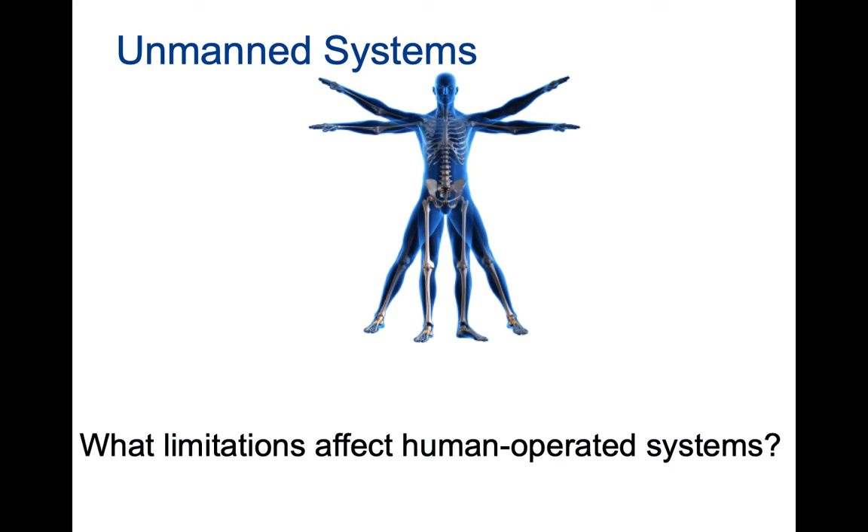When you consider NASA astronauts or aircraft used in the military, spy planes are a great example because spying can take a really long time sometimes. What are the limitations? Well, how many hours can you stay awake for consecutively?

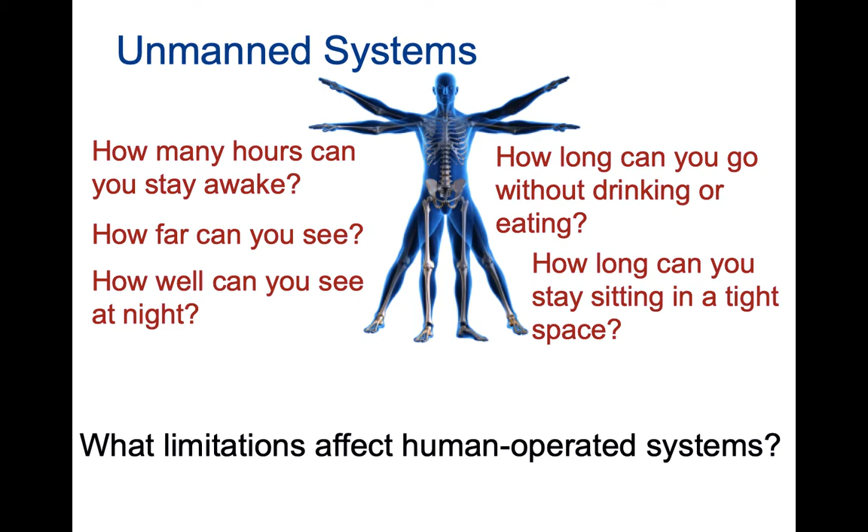Most of us operate on 12 to 18-hour days. How long can you go without eating or drinking? How far can you see? How long can you stay sitting in a tight space? How well can you see at night? How long can you survive in the vacuum of space? And how long can you survive in microgravity?

So these are all questions that Boeing and Lockheed Martin and NASA and other companies have to deal with all the time when it comes to trying to understand how humans can operate and under what conditions.

Even the best military pilots and most well-trained astronauts are going to struggle and have these limitations. So this brings to the forefront the idea of unmanned systems and the inherent advantages that an unmanned system can offer. And, of course, this final question here: what is the value of human life?

Obviously, we don't want to lose human life, and so this cannot be overstated. The idea of an unmanned system can really ultimately prevent human lives from being put in harm's way, and so that can go a long way to protecting us.

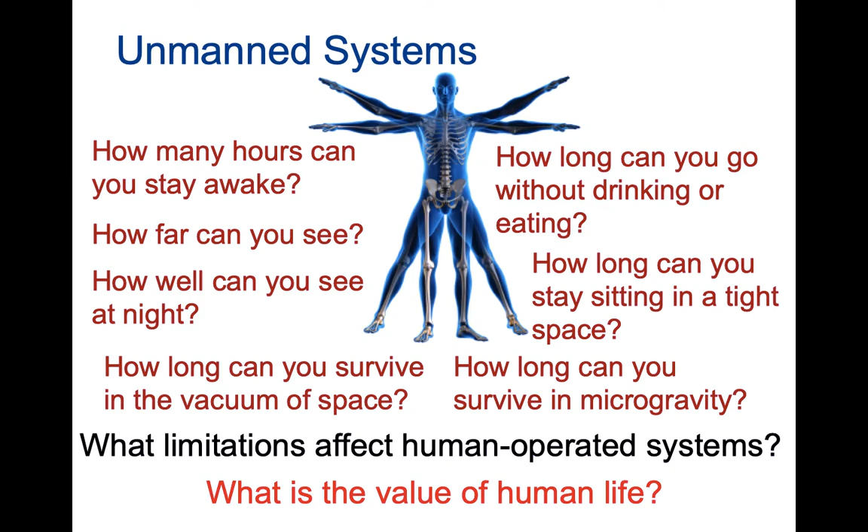So, a system without a human on board, the human factor obviously is going to be reduced. But that requires a lot of technology. In order to do that, well, first of all, you can't truly replace the human brain on board. That's an impossibility at this point because our computer systems don't have sufficient AI to truly replicate what a human is capable of.

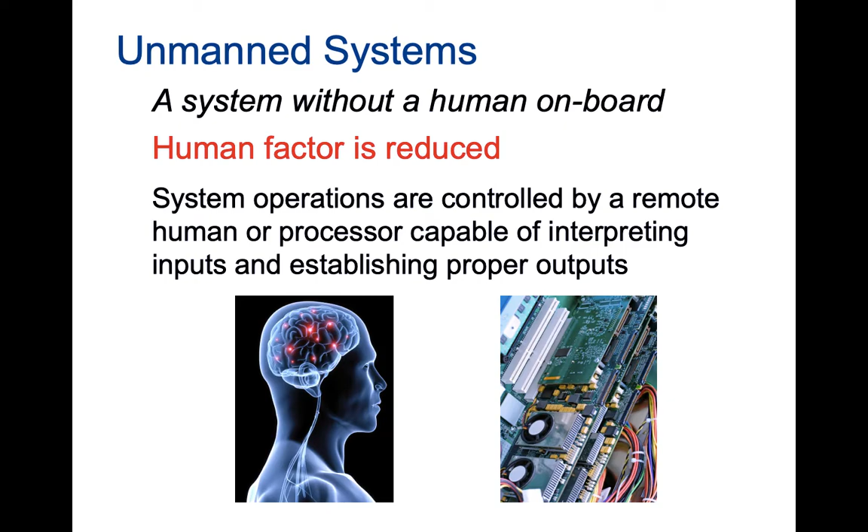But that said, if you know exactly what your system is going to do in a very routine and rigid way, then yeah, you can replace the hands and motor controls and just routine rote operations that a human could do. You can't replace their decision making, you can't replace their critical thinking, but you can replace the mundane activities of a human, and that's what unmanned systems really look to do.

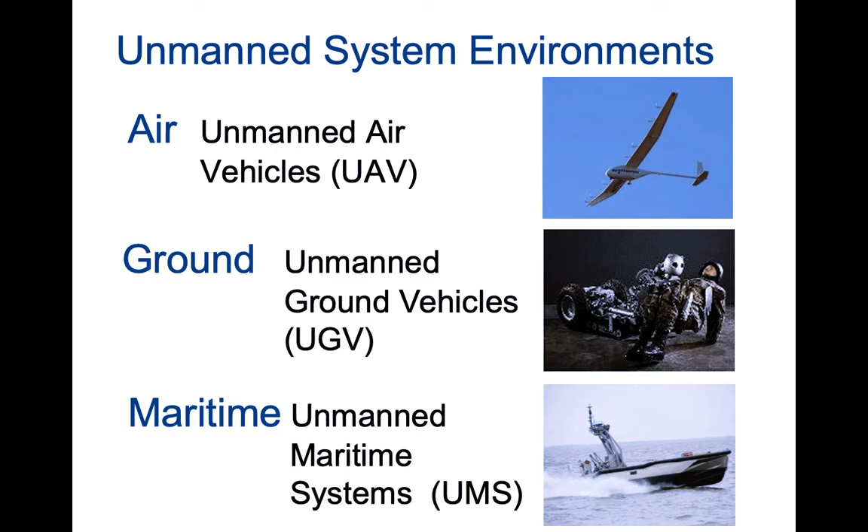So these are just a few examples. Obviously we have three categories that we're looking at. We're aerospace, but we're not only looking at air vehicles, we're also looking at ground vehicles and maritime vehicles. And I would extend this into space vehicles as well. I'm not exactly sure why they didn't include that, but I do have a video that gives you an idea

of some good examples for unmanned spacecraft. But that's very common. Unmanned spacecraft is much more common than manned spacecraft. So we have many, many unmanned satellites. We have many probes, many missions to other planets. In fact, every mission to another planet has been unmanned. We've never been anywhere but Earth and the Moon.

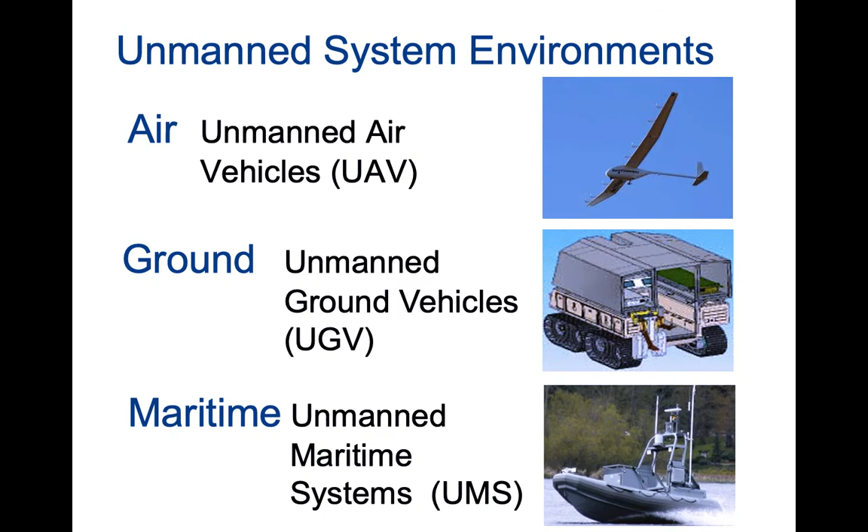So in any case, if we have air, we call those UAVs, which we've looked at in the past. UGVs or ground vehicles, and UMS, those would be water systems. So submarines or any underwater or even above water boats and watercraft.

So when it comes to the design components, in other words, you're a designer, an engineer, and you want to consider what is important when you're trying to create a vehicle. Yeah, operational environment and task. What do you want to do, and what is the environment in which you need to do it? That's the most important question.

Sensing is very important because if your craft is going to operate in an environment and it's going to do so autonomously, then its best bet is to gather information from its environment. So sensing is very, very important in order for it to, quote, make decisions — in other words, respond to its environment. And that's where the information processing comes in. So you could put communication in there in two different ways.

Communication could be between the sensors and the processors of the unmanned system, but the communication could also be relaying data back to the human system. So it could be sending, for example, you could have a space probe sending data back to NASA. So that communication can go either internal or external.

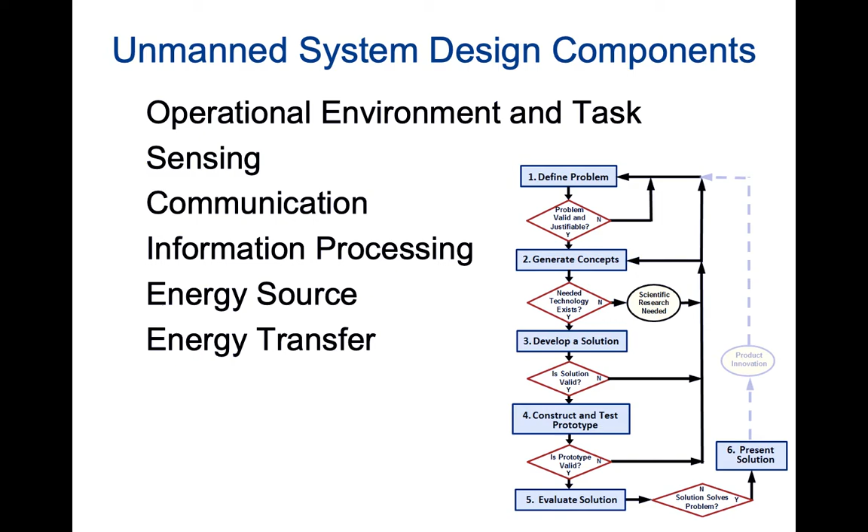But certainly you need information processing. And then critically, you need an energy source and energy transfer as well. Energy source is simple enough for us, right? We're talking about fuel or a battery, whatever it might be. And energy transfer depends upon the circumstance, but it's generally related to how that vehicle interacts with its environment. But we're going to talk more about that.

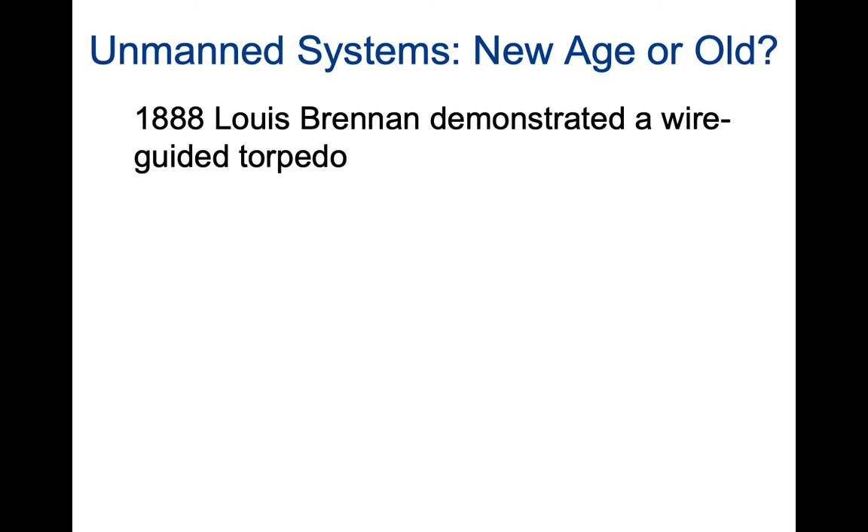Okay, so unmanned systems, new age or old? Well, this is a bit of a history, right? In 1888, Louis Brennan demonstrated a wire-guided torpedo. In 1898, Nikola Tesla introduced the teleautomaton, a 4-foot-long boat that could start, stop, and turn using radio frequencies.

This is actually kind of funny. You can read stories about this, where he had this little boat in a fountain, and he convinced people that they were controlling the boat with their speech. So they would tell the boat to do something, and the boat would turn and obey their commands. But really, what was happening is there was a remote control, which of course was brand new and nobody knew about, because Tesla was using radio control for the first time. So he would simply listen to their commands and then turn the boat the way they told him to do it, and they were none the wiser. So he convinced people that the boat was listening to their commands, but in reality, he was just using a radio-controlled device.

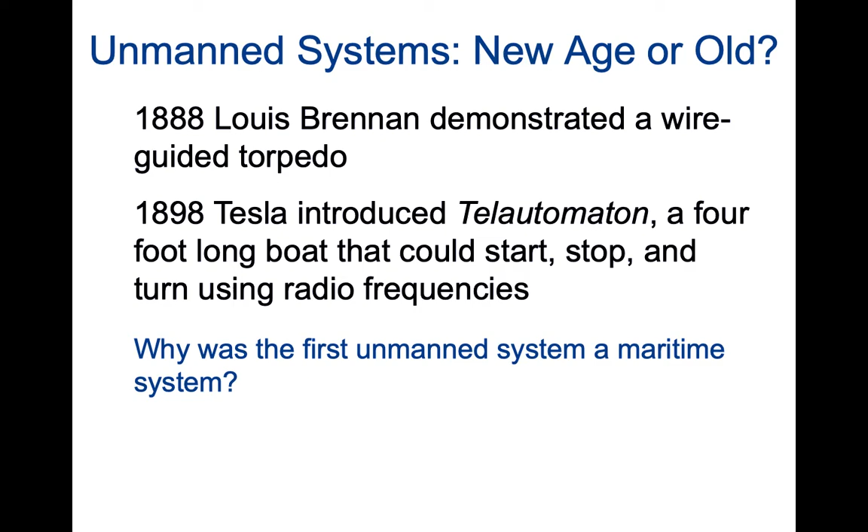Why was the first unmanned system a maritime system? Naval warfare was actually a pretty significant focus for military strategists at the time. So right around the turn of the 20th century, the Navy was really trying to expand their capabilities, and they were trying to investigate what are the options for unmanned vehicles to get an edge in warfare. That was one of the reasons why there was a lot of research in that, and it ended up coming into tremendous use in World War I and World War II.

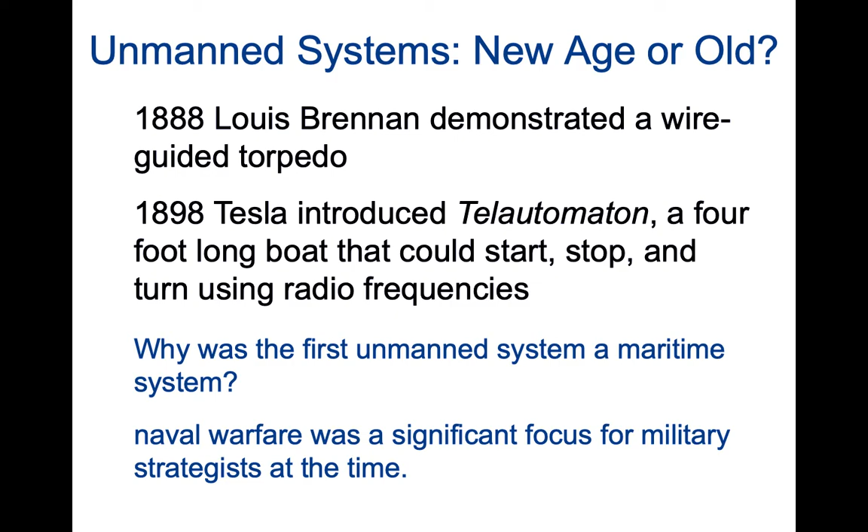So, what concepts did Tesla need to understand in order to create his unmanned maritime system? As we said, this is the design process: the operational environment and task. Obviously you have a water system, so buoyancy is very important, understanding Archimedes' principle, which we studied in physics.

Materials, because if you're going to have particularly a craft in salt water, then there are material limitations, corrosion, maintenance and things like that you have to consider. And of course the structures themselves. In other words, how are you going to piece these things together? What is an appropriate structure for such a device? There are many different approaches you can take, of course.

You have to understand physics as well. So not only the buoyancy, but you have to understand inertia, and you have to understand how this object is going to respond to these commands.

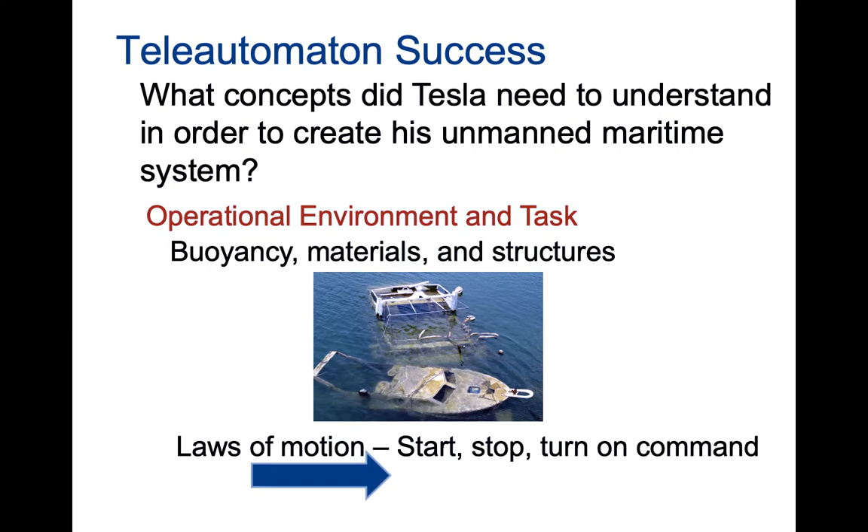You had to have an energy source. So for Tesla, it was a battery. His boat had a battery attached to it, and that was his source. But again, around the turn of the 20th century, this is still pretty new stuff. People didn't even fully understand this. The average person didn't. Energy transfer, right? So you have to have a way to get that energy from the battery into motion. This is what we call a motor typically, an electrical motor, to transfer energy from the battery to the actual device that's going to cause your unmanned system to move.

So you have to have that energy source, and then you have to have that energy transfer, which, as I said before, interacts with the environment. In this case, the motor is going to transfer energy from the battery to the propeller, and ultimately, via the propeller, to the environment, which is going to allow the boat to push the water, and then the water pushes the boat. So that energy source and energy transfer are critical.

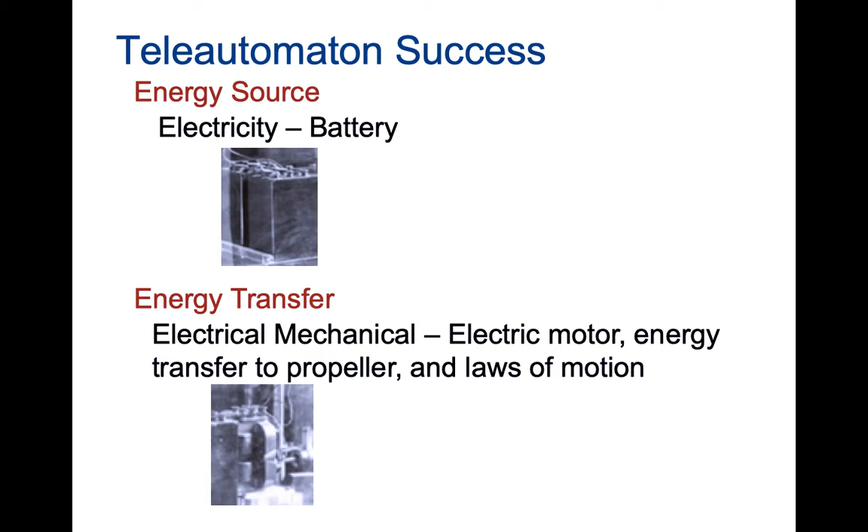Communication, in the case of this Tesla example, was the radio frequency. So we had a communication between the device that controlled the boat and the boat itself, using electromagnetic radiation. This is still pretty much how we communicate with all systems around the world. We're generally using radio waves. Anytime you're making a phone call, using television signals, interacting with satellites, GPS, this is all on the electromagnetic spectrum. So that hasn't really changed a bit.

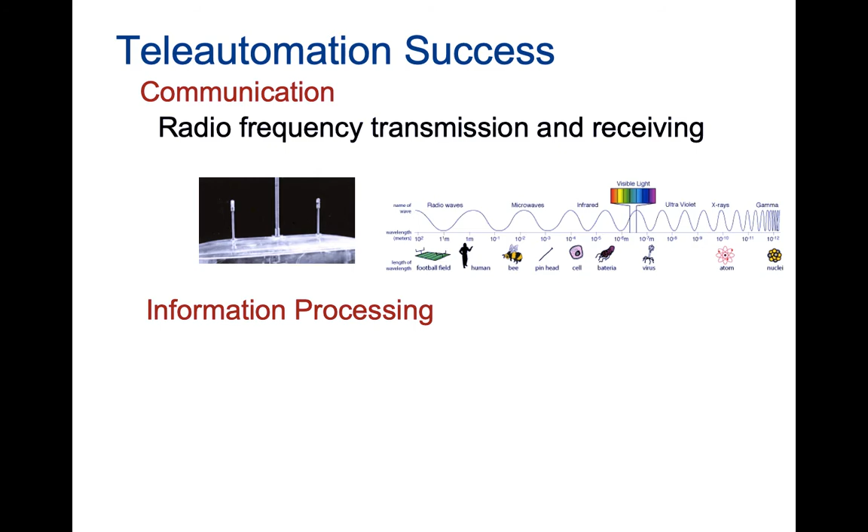And then, of course, information processing. There were very primitive, mechanical computers, if you will. What you needed is a way to transfer information about communication into commands on the boat, and that was probably one of the most difficult hurdles for Tesla to overcome because they did not have computers. Computers were still another 50, 60 years away. So Tesla had what could be referred to as a very crude mechanical computer that allowed his boat to transfer an incoming radio signal into a command for the motor.

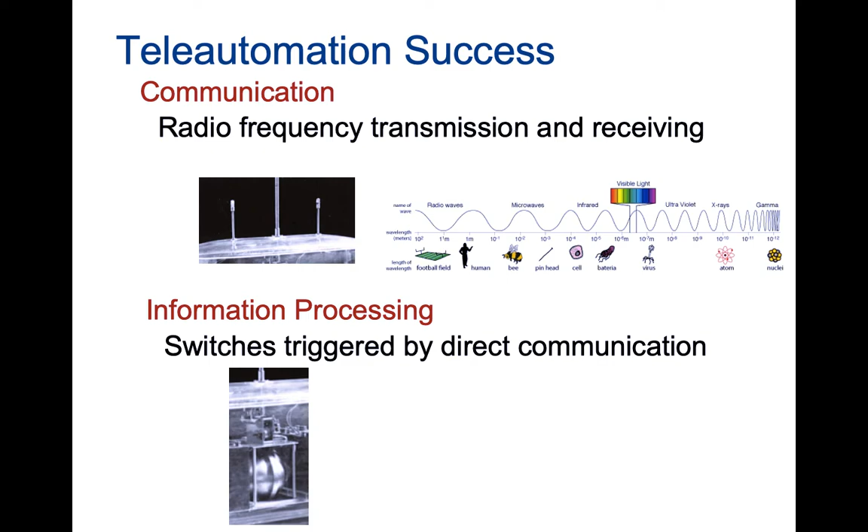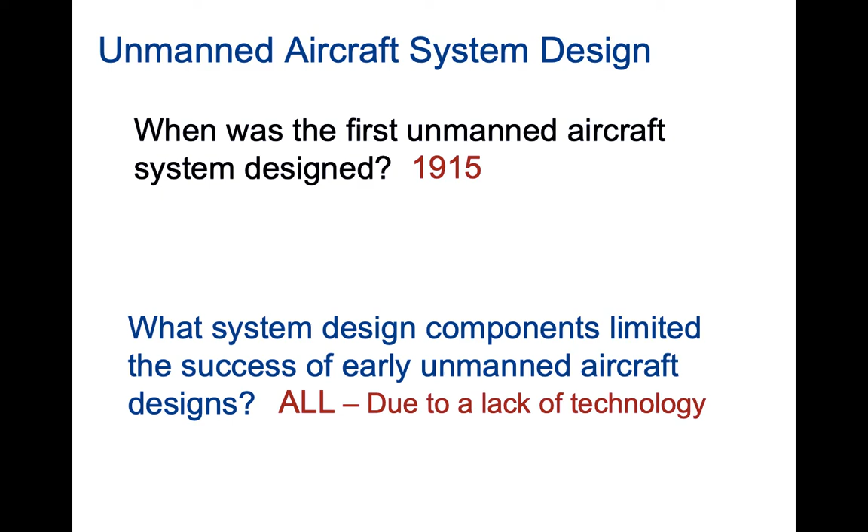So this first unmanned aircraft was actually designed in 1915. This is remarkably soon after the Wright brothers flew, so that's a very short period of time. But as you can imagine, with an unmanned aircraft system being designed so shortly after flight, there were very many limitations. So what were some of the components that limited the success? Well, pretty much everything, right? There was so little technology around at the time. These were not advanced aircraft systems.

So what were the operational environment and task limitations? Well, flight concepts weren't very well understood. Automatic stabilization didn't really exist. Remember, automatic stabilization means designing the aircraft so it has positive stabilization - it's a very stable craft, so it's not as maneuverable, and it'll automatically head back towards its equilibrium point. Autonomous navigation didn't exist at all, so at best you're radio controlling something, and then you're going to lose range shortly after. So it was very limited.

Today, with autonomous navigation, you don't have to worry about radio control. You can still do this with drones and stuff - you can control them via radio, but we know there are autonomous drones now. We understand many of the flight concepts, so we have a very robust theory around that, and we have automatic stabilization. That's not a problem anymore.

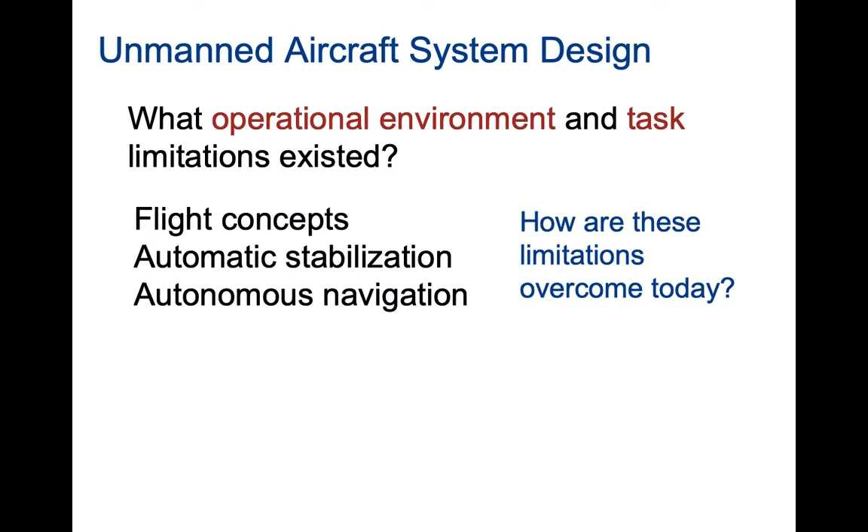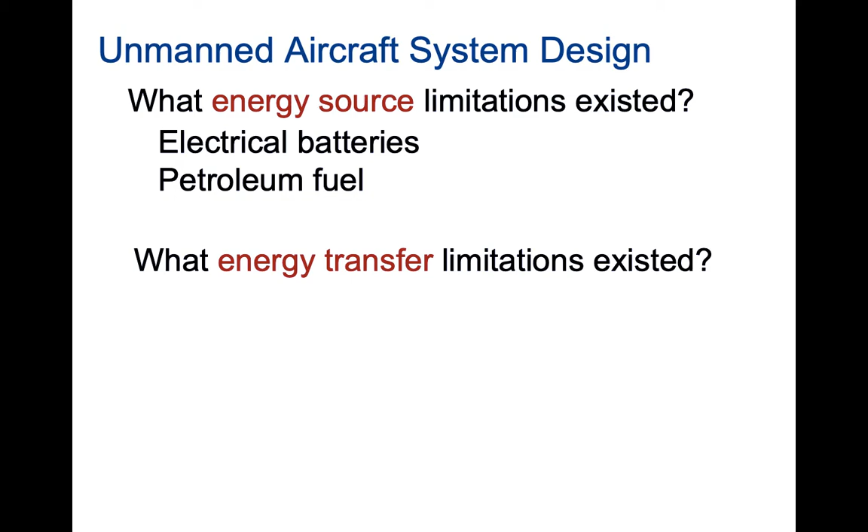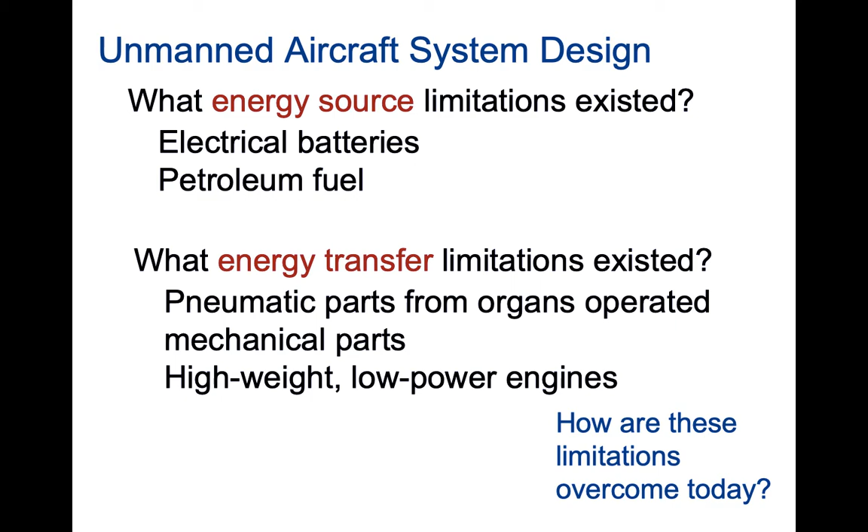And what energy transfer limitations existed? As it says here, pneumatic parts from organs - we're talking about the piano type church organ - those were used for mechanical parts. They were very high weight, low power engines, again very inefficient. So energy transfer from the energy source to the environment was very low. Today we've made tremendous strides in terms of motor efficiencies and in terms of battery and power sources.

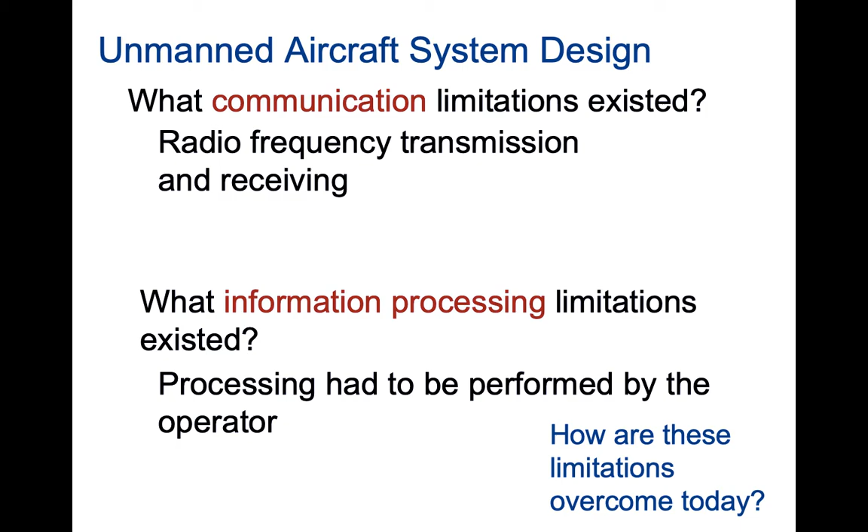And what information processing limitations existed? Well, tremendous information - it pretty much had to be done by the person operating. There were no computers. Today, of course, we have computers, and we have very cheap, very powerful processors that occupy very little space. In the early days of computers, you've probably heard that computers used to take up entire rooms - the Turing machine and things like that. They were very sort of mechanical systems. And what we've done is we've miniaturized those switches down to the nanoscale - now we're talking about 9 and 12 nanometer processing scales. So obviously huge advancements in information processing. That's where it's changed the most.

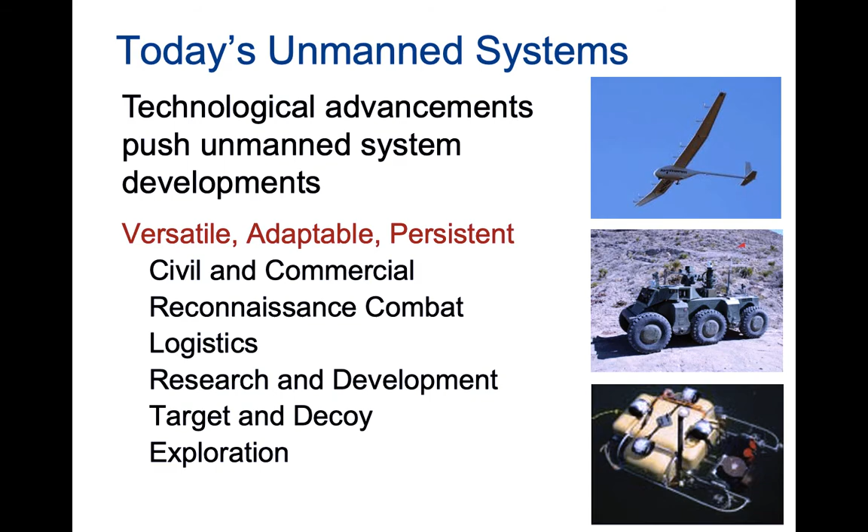So today's unmanned systems are very versatile, adaptable, and persistent. They're used for all sorts of different applications, civil and commercial. We now have Amazon delivering packages via drones and other companies as well, plus reconnaissance and combat - we have spy drones, we have attack drones.

I don't need to tell you guys this, you've seen it in the news. Logistics, like UPS, right? But certainly solving all sorts of problems and doing all sorts of mundane tasks. Research and development, target and decoy, exploration.

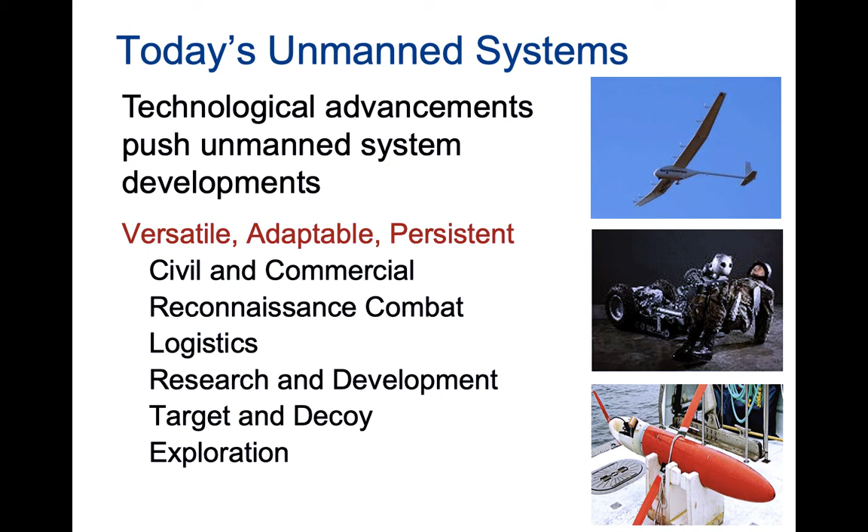That last one, exploration, is a big one when it comes to two frontiers: space, which is obvious, but also the deep depths of the ocean, where you really can't put people very much. We've had only a handful of people at the bottom of the ocean, fewer than have been in space. So we still have a lot of exploration to do, high and low.

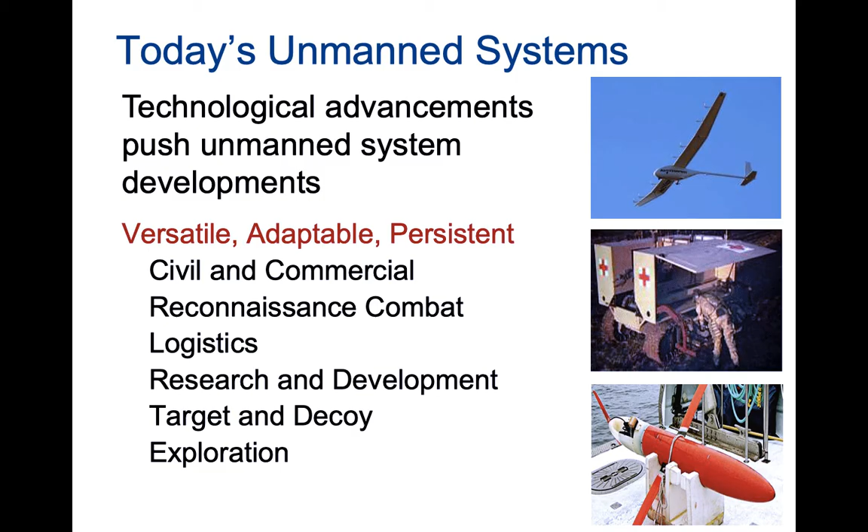So that is the end of the presentation, and I want to take the last couple of minutes here to just introduce you to the assignment you're going to be doing.